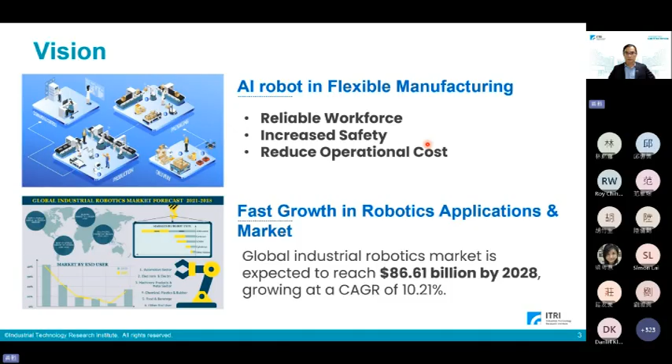And the other aspect is that if we see the forecast, every year the forecast is that service robots have greater opportunities than industrial applications. And we believe that in the current trend of generative AI, we can really see that service robots are a potential opportunity. Okay, so let's move to ITRI's core robotics technology.

The robotics division was established in 2005. So up to now, it's 20 years. Over these years, we have accumulated lots of foundation technologies and research. The first focus, from 2005, was service robotics. At that time, we developed cleaning robots, security robots, tour guide robots, etc. And we established the core human-robot interaction technology.

From 2010, with the help of Industry 4.0, our focus shifted more to the industrial robot. That includes robotics hardware design, and also autonomous mobile robots. Our focus is still on the control algorithms and our controller, which is the heart of not just the industrial robot, but also the AGVs. And in 2015, there was another digitizing trend. So we developed our own simulator enabling digital twin, cyber physical systems. And in recent years, of course, artificial intelligence and robotics solutions for manufacturing are our focus.

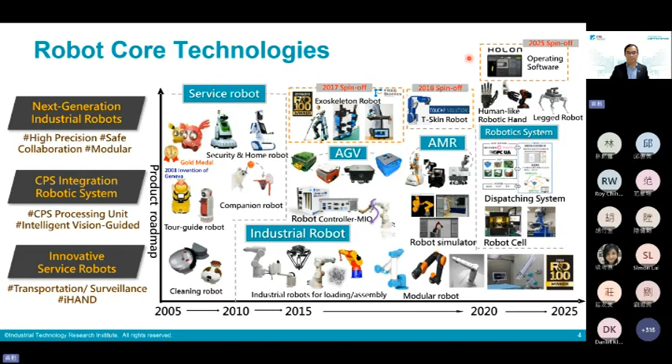In 2017, we have a group doing the exoskeleton startup, Free Bionics. In 2018, another group focusing on robotic skin, enabling industrial robots to transform into collaborative robots. And this year, another spin-off, Holon Robotics. That's a team which provides operating systems for industrial robotics. And the vision is to make robots as easy as possible, like the iPhone, so everyone can leverage robots in factories.

Okay. And a quick glance at the focus that the EVP just introduced. The first focus is the controller itself. We have various control capabilities, including position, velocity, force, and human-robot interaction control. That's the basis of robotics. Later on, we have our own simulator, which currently can generate data for AI models to train. Vision is also important. So we have vision-guided robots and a lot of AOI inspection applications in factories. The work includes metal works and a lot of manual works in factories, including drilling, painting, grinding, polishing. And with this we provide real solutions for the industry.

And the next is mobility. Before it was autonomous mobile robots, and now it's mobile manipulators. Later on, we will have humanoid or legged robots.

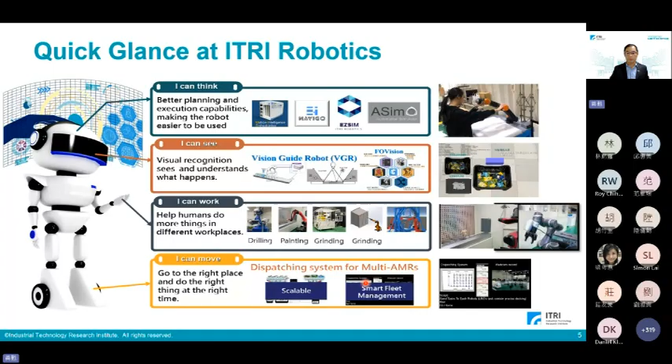So first, I would like to share with you some innovative design. For the robot hardware, we have a detachable joint system. As you know, we can have industrial robots, we can have mobile robots, but the very fundamental unique core could be a joint. If we can have this all-in-one joint, people can easily assemble joints to different kinds of robots. That enables legged robots or humanoid robots, especially when we need customized applications. This all-in-one joint is a really good solution.

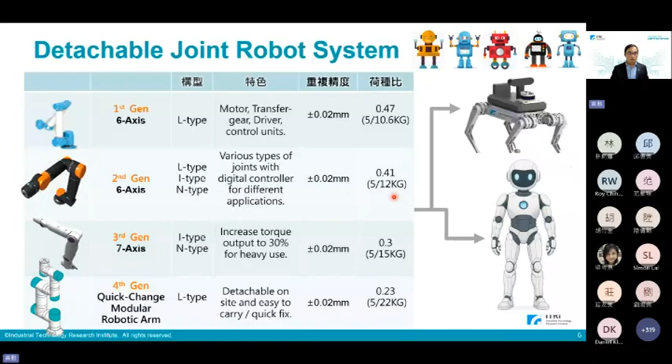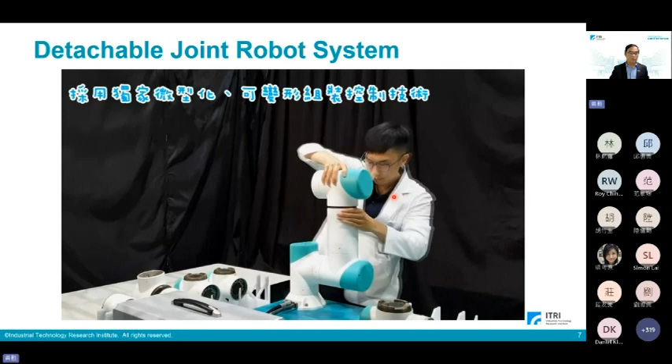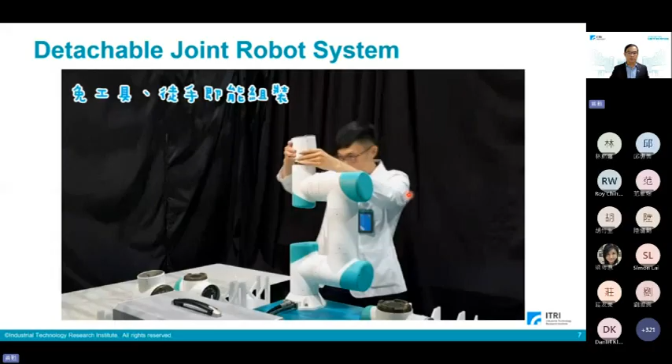So we can have a video. Users can easily assemble by hand this detachable joint to their own need. So we can have a 4-axis robot arm or 6-axis, or even in the future, we can make more joints to have dual arm robots and also mobile platforms. That enables various kinds of applications.

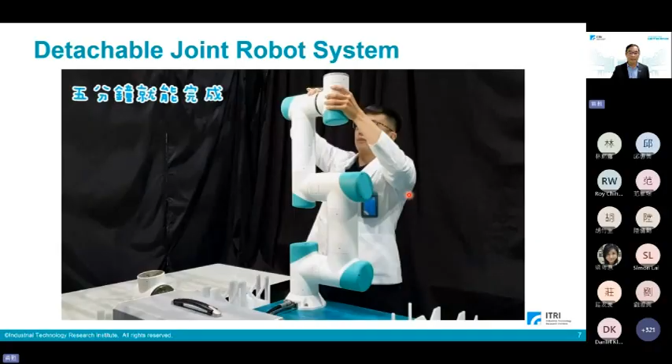Another advantage is that in case of a repair or some broken joints in the factory line, we can easily switch a joint. So we can reduce the downtime and also quickly repair the manufacturing.

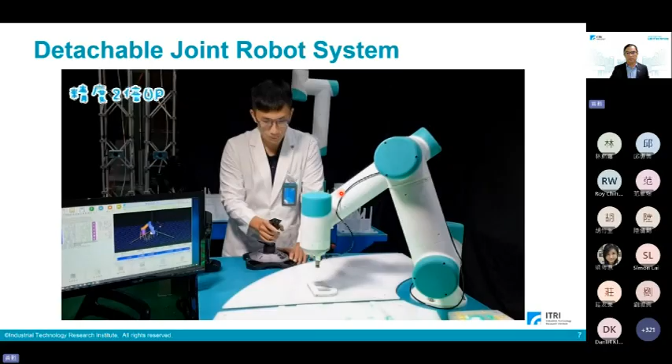Another thing is that ITRI actually includes a lot of different laboratories. We have a laboratory focusing on information and communication, a laboratory for smart sensing, and a laboratory for biomechanics. So it's a really good opportunity if you work in ITRI to have collaboration with people or talents from different fields.

So for example, sensors are very important to robotic systems. We have a smart sensor laboratory center that can provide the sensors we need, for example MEMS microphone, inertial IMU sensor, 3D sensing, or force sensing. Co-working with this multidisciplinary lab really enables this future technology. So that's a great benefit to work in ITRI.

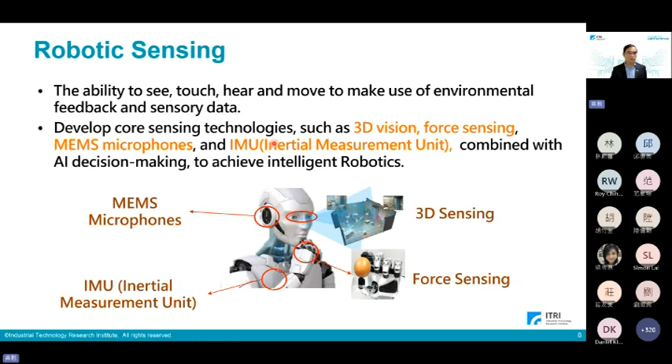And our robotic system, this is a concept for a robot cell. If we want a robot to be used in a factory, it's better to have a really all-in-one unit solution. So this is one example where we use the robot as the centric machine in an integrated simulator. This can be seen as a robot operating system. We can easily control up to 4 manipulators in a solution.

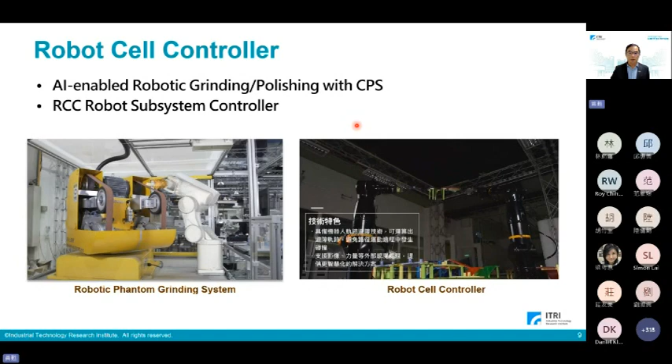For different applications, we use the robot cell controller as a center. Together with the digital platform, we can easily perform different machining works for different workpieces. As you can see, this is a really cross application. So we can use robot cells as a unit to introduce this kind of robotic solution to different work in factories, including grinding, polishing, painting, welding, and different materials like composite materials.

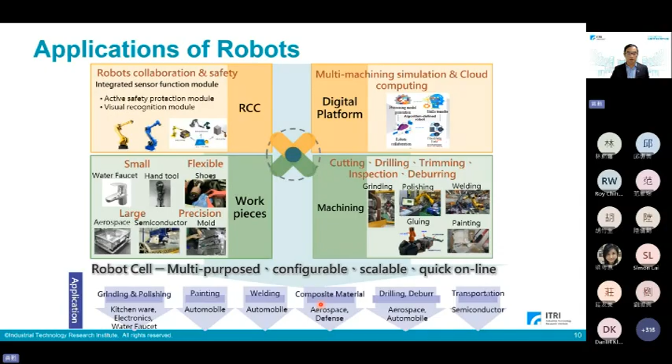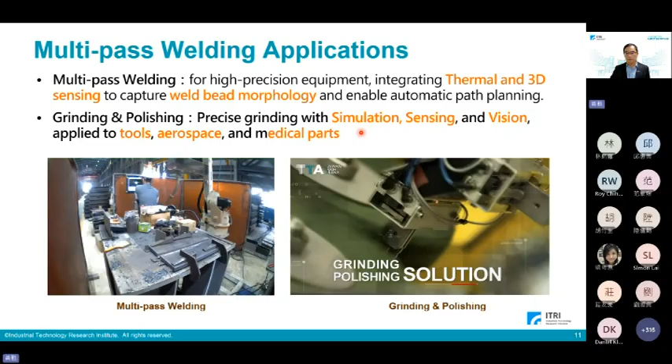This is an example for welding applications. This is a really great opportunity and huge requirement from the factory where we can introduce our robotics system.

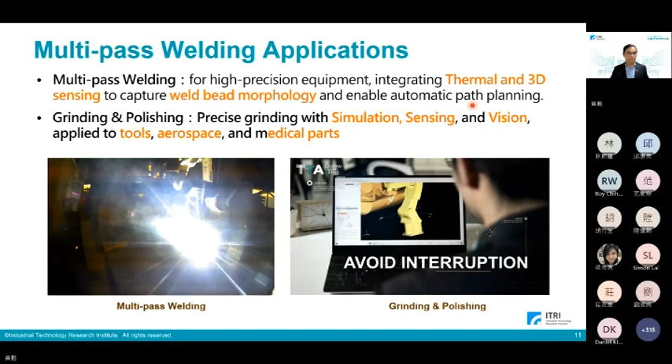Not just for industrial applications, the core technology we accumulate can also be used in the service domain. So these are a brief introduction of how we use our robotics technology for different domains outside factories.

For example, in logistics or warehouse transportation, we use a mobile arm robot and autonomous forklift to solve problems in factories where workpieces and metal parts can be transported within the factories.

And for the service domain, we have used this kind of autonomous mobile robot in convenience stores or shopping malls to help people refill the goods or check the goods.

Not just for shopping malls, we can also introduce hospital cleaning. So we have this kind of cute robot doing floor cleaning. And the core technology includes self-navigation and map building, and of course obstacle avoidance.

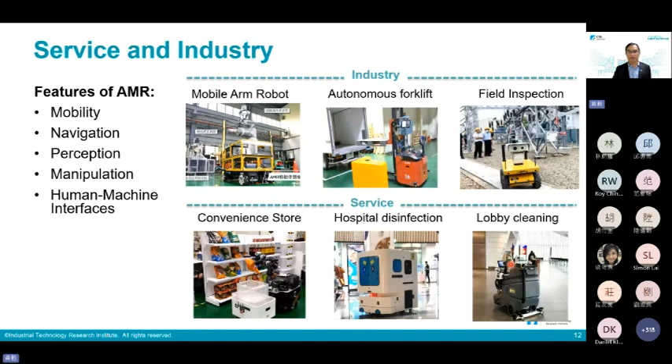Later on, we introduce more human-robot interactions, so the robot can answer questions for clients or patients. And of course, in airports, train stations, or other business fields, we can use these cleaning robots.

And one unique application is medical applications. Our high precision robot technology and also imaging system can not only be used in factory or manufacturing products, we can also use that to save lives or to improve medical procedures.

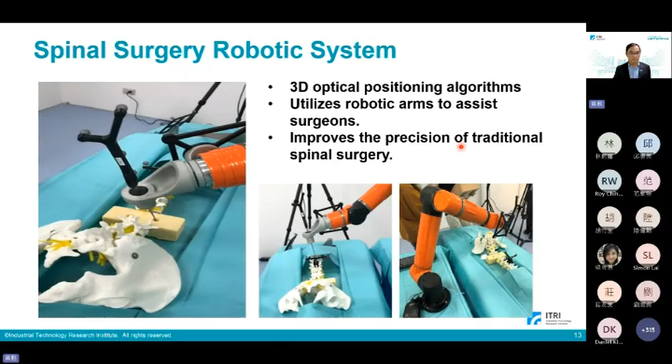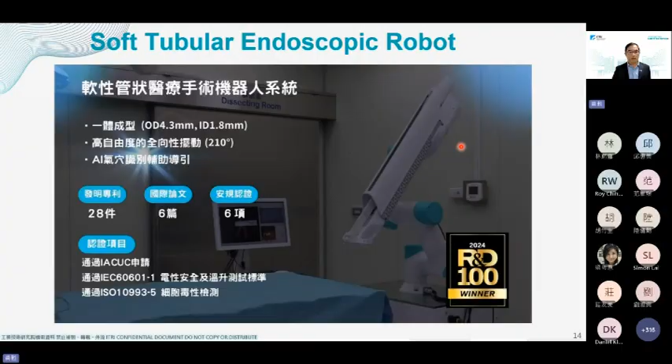So this is the example for robotic system to do the spinal insertion. Another one is for beyond endoscope surgeries. So that's what we called soft robotics.

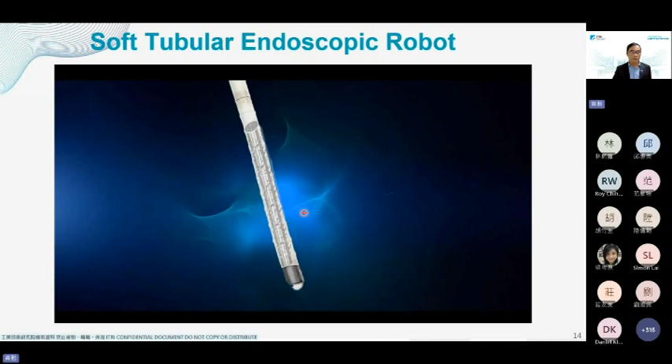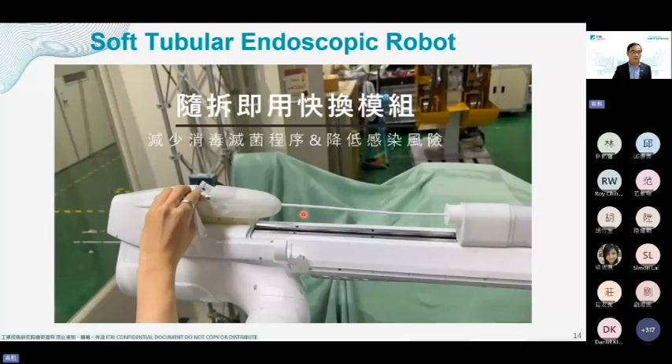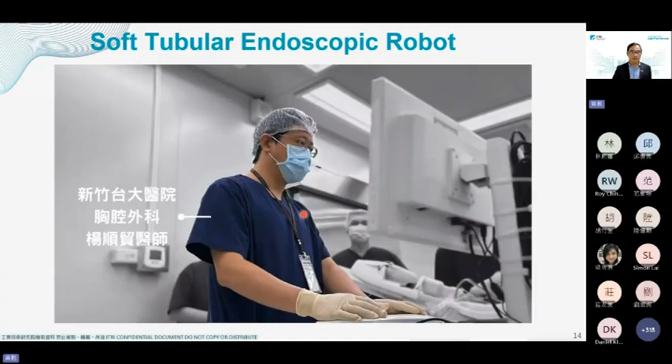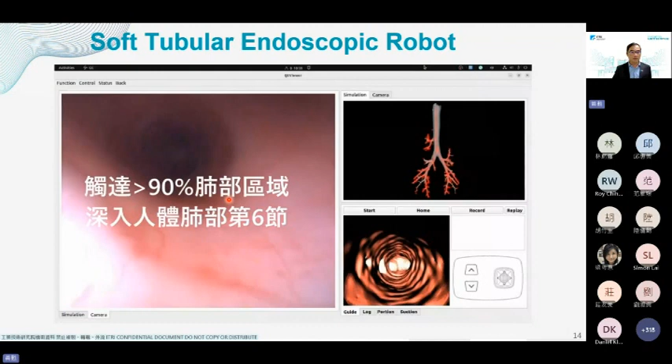So we have a robotic endoscope. In this case, it's for lung cancer. We can have this really tiny part of the tube with the diameter only 4.3 millimeters, together with the navigation system, and we can help this tube endoscope to move around within the body to a really precise location. And this is an automatically delivering system where we can easily use it for biopsy or drug displacement, or we can even ablate it if there is something that needs to be removed.

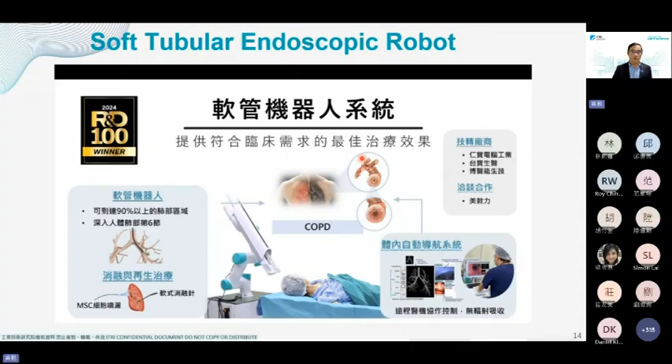This kind of surgery means we don't need to cut up your body, we can use the natural orifice in your mouth or nose. So it's really the future of medical applications.

Okay, for the last 10 minutes, I would like to share with you some artificial intelligence enabling robotic systems. As we know, ChatGPT and generative AI really demonstrate capabilities in programming and also in human-robot interactions. So we can leverage this kind of technology or model for robotics.

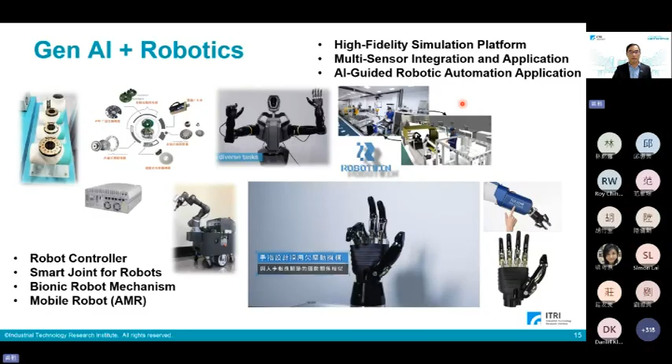So in ITRI, we have good foundations and mechanical parts. And next, we will introduce the artificial intelligence and training models.

So we can easily adapt a large language model to robots. For example, for cleaning robots, for service robots, interactions or GPT-based natural language interfaces are now already introduced to many kinds of robots in the service domain.

And we, on top of that, build a next step, which we call a behavior model. In order to make the robots useful, generative AI can be a part to generate various kinds of behavior. But that kind of behavior requires a lot of data to train, and also a lot of sensory input, including vision system, motion system, tactile sensor, to train the robots for behaviors.

And ITRI has the information and communication technology lab. We also leverage the biggest training server in Taiwan, so we can really use it to recreate the virtual environment, using great computational power, not just in ITRI, but also the Taiwanese government provides this to have a better, faster training for the behavior models.

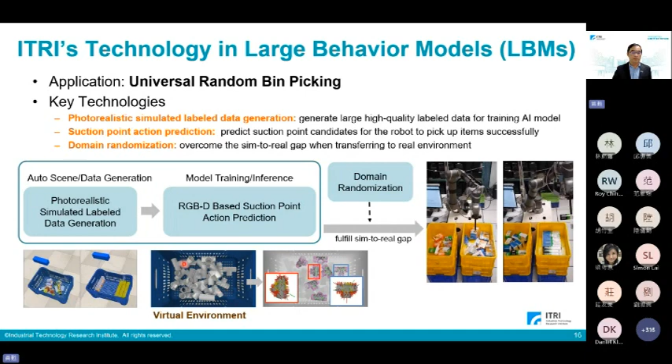And also, the world model is important. The robot needs to know the environment, not just as images or obstacles, but really the semantic information of the object. So we need to even build up larger world models.

So this is also now in the process of being done. And that world model can be used not only for robots, but also for drones, and as far as I know, also autonomous driving systems. As far as I know, we already built up some map and really the model for the ITRI campus.

So maybe near the end of this year, we will see many robots walking around or moving around in the ITRI campus.

And this world model can be used to train behaviors and also interactions, even tasks for robots, really fast and really useful. So the control of robots is now shifting from model-based, like traditional kinematics and dynamics, to a really new area, like learning-based. So we have to establish this behavior model, world model, to enable this kind of training-based, learning-based robotics. Together with the modules and hardware design, we reduce the gap of sim to real.

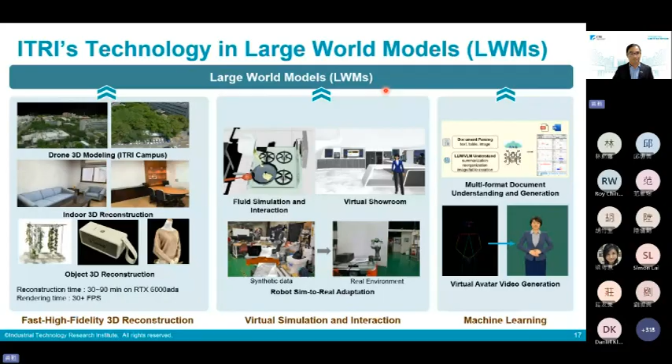And very fast, you can see the progress in this kind of learning-based robotics. Okay, so the last part I will showcase one closed loop example that we cooperate on with artificial intelligence and robotics. So the scenario would be like in the living room, where you're just sitting on the sofa, and how a robot can really perform or service you in this way.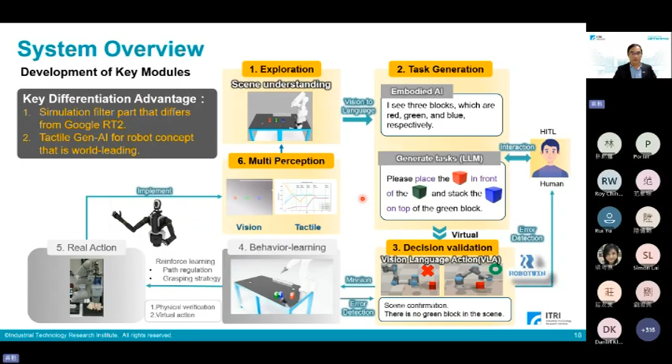So we're starting from the exploration. The world model, or the robots, need to understand the environment, which we call the technology of scene understanding. Then any human or user can use natural language to interact with the robots, to talk or discuss the task with them. With some verification, human in the loop, or confirmation, the robot will generate a task using a visual language model. In the end, this confirmed task can be validated and deployed in a real system with real actions. So that's the video, including all of that.

So the first is the scene understanding. This place is a cafeteria in ITRI, one of the cafeterias, very beautiful. You can see that the robot just moves around with its RGBD camera to reconstruct the environment. For your case, maybe the living room or your bedroom.

So once the robot recreates this environment, together with the large language model or visual language model, the objects can be recognized and reasoned about. So the robot can know the exact environment of this location. That's what we call embodied AI.

So you can use a text interface just like ChatGPT, or you can use voice interactions to talk to robots, to really ask about the correlation or the understanding of this environment.

For example, you can ask the robot to identify the location of a coffee machine or the microwave on the table, or even the vending machine. They also have an understanding of the relationships between objects. For example, the vending machine is on the left side of the microwave, and the coffee machine is on the right side of the microwave.

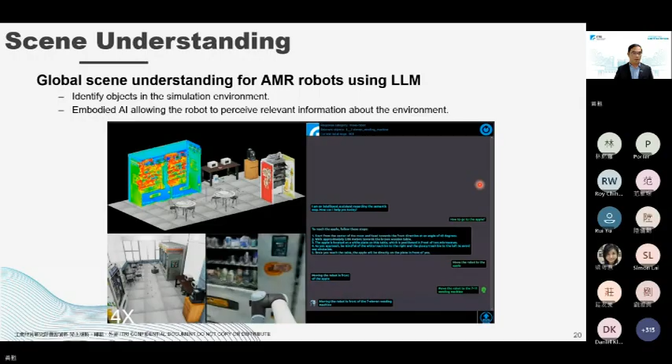So in the last video, we combine all these scenarios. First we visualize everything. This is the model of the cafeteria. We used real images and recreated the virtual model.

And this is the text interface where we ask the robot to identify the location of the vending machine and the coffee machine. You can see the bright lights shining, overlaid on the position, which confirms that the robot really understands and knows the exact location of the object.

We can also ask, like GPT, what objects are on the table. It will reply: an apple, a plate, a microwave, exactly, along with the location. So we have coordinates of these objects.

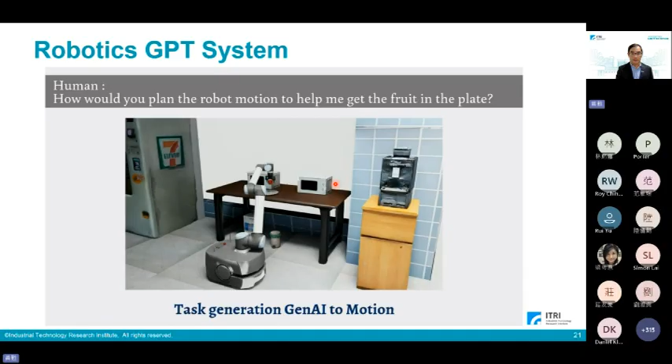Then we can ask the robot to perform tasks. For this case, we ask the robot to pick up an apple and put it on the plate. With the information of the coordinates, the trajectory or behaviors can be generated by the robot.

In the end, we deploy this on the real manipulators in the cafeteria, and the robot can grasp an apple and put it on top of the plate.

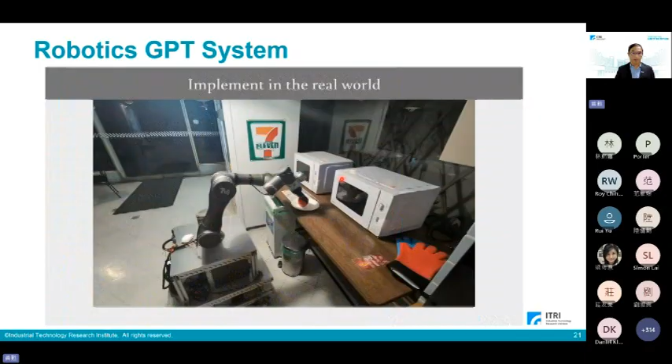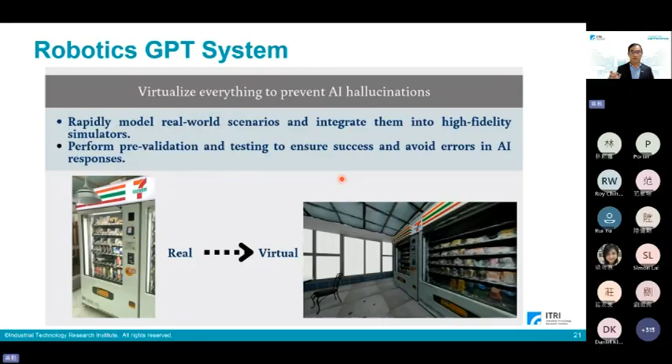So all this demonstration, unlike the traditional way, really reduces the effort of engineers having to code, write state machines, or write control for robots. Generative AI really helps a lot. With the establishment of the world model, behavior model, and even language model, this really accelerates this integration.

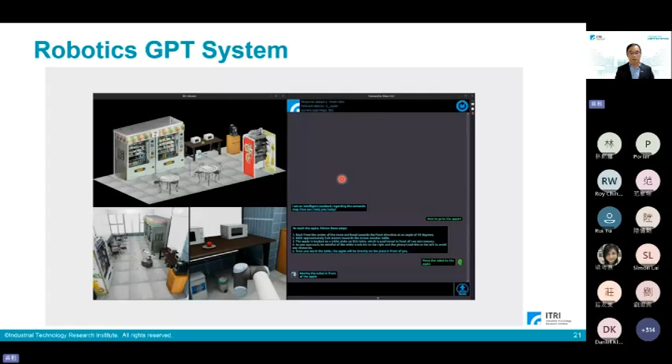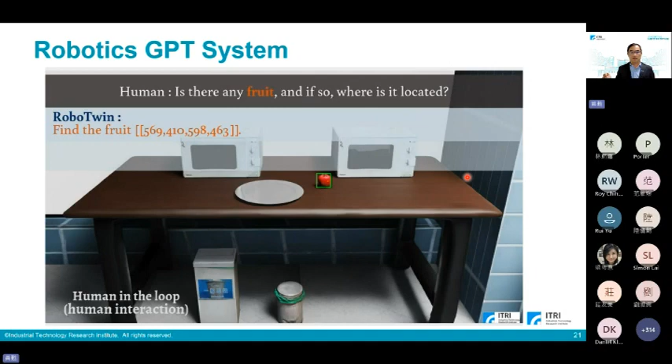for robots that can really provide services in everyday work. So we are still in the process of integrating this, and now we have a really good team working on artificial intelligence, mechanical robotics, and also sensory information, etc. So we believe that the progress for this trend will be really fast.